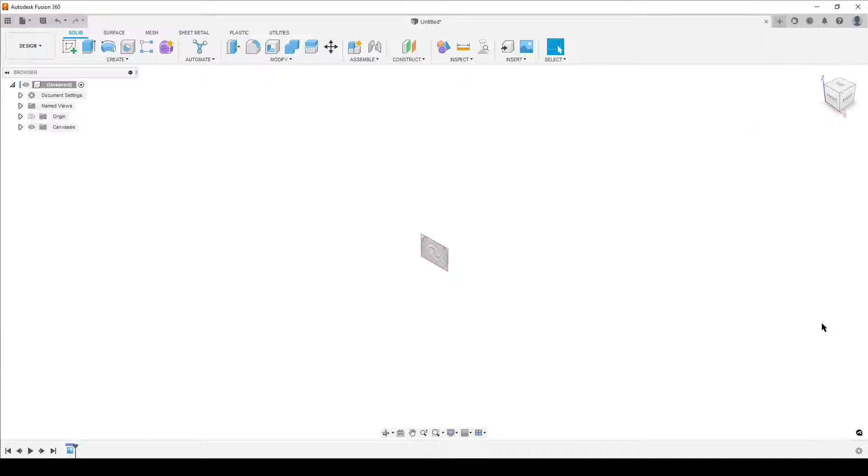The bug is quite simple, it's concerning canvas. So we're going to insert a canvas, insert from computer, select an image which I happen to have on my computer, and select a face. I'm going to do it on the front face here, hit OK, look at the front so it's a bit easier to see the canvas, and zoom in a bit.

I'm going to open up a canvas in the browser, right click and select calibrate. This is the normal workflow, you start by calibrating your canvas. Let's say this here is going to be 100 millimeter, so we zoom it out a bit.

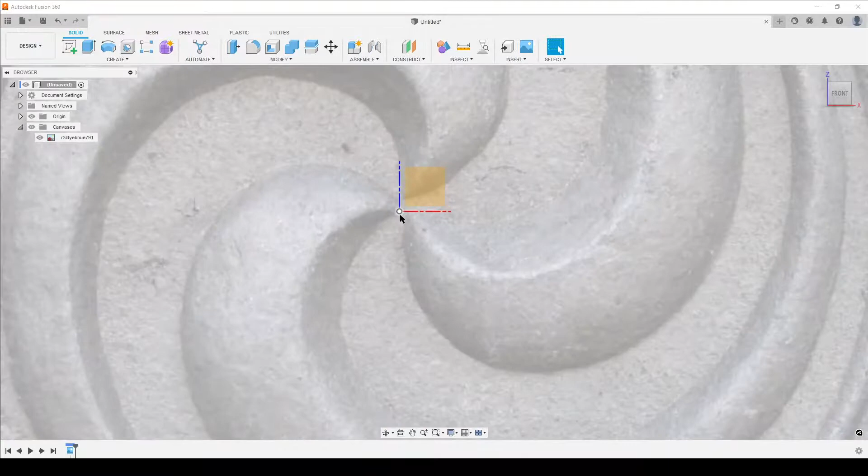We want to check if it's centered, and oh no, it's not really centered. I want the origin to be all in the center, it's easier to sketch things. So I'm going to right click and edit canvas and see what happens. Pay attention to the orientation and the size.

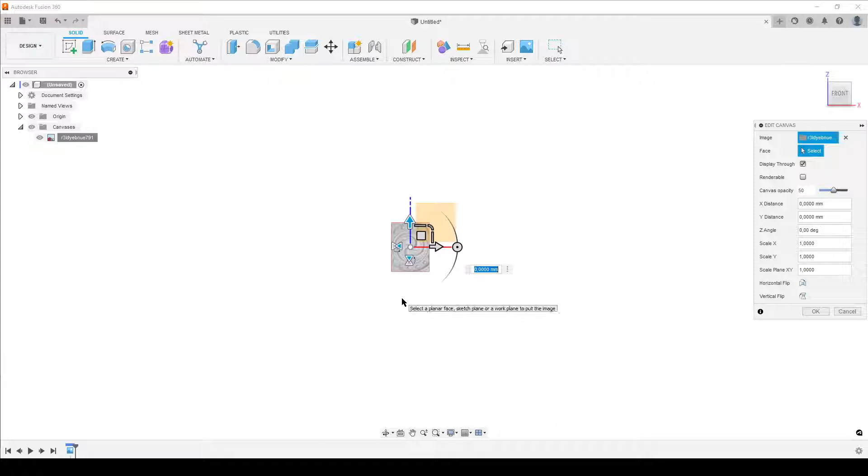When I hit edit the canvas, two things happen. For some reason the canvas gets rotated 90 degrees and it gets rescaled to its previous size before the calibration. I think it's before calibration. Anyway, very annoying bug. We can of course now go in and move things around and hit OK.

Let's say we want it there. That's of course the wrong place. Once again, we can do a calibrate. So, okay, let's just recalibrate it, it's no problem, let's do 100 again. And oh no, even more away from origin.

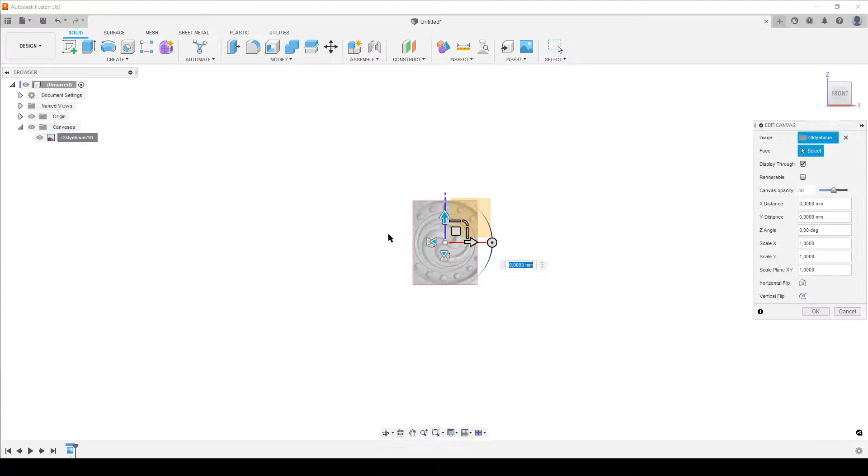Right click, edit canvas, and once again it gets reset to basically its original position, original size, but for some reason rotated 90 degrees. So really annoying bug if you're using canvases.

Here is the workaround. Let's remove this design, start a new one, don't save, I don't need it.

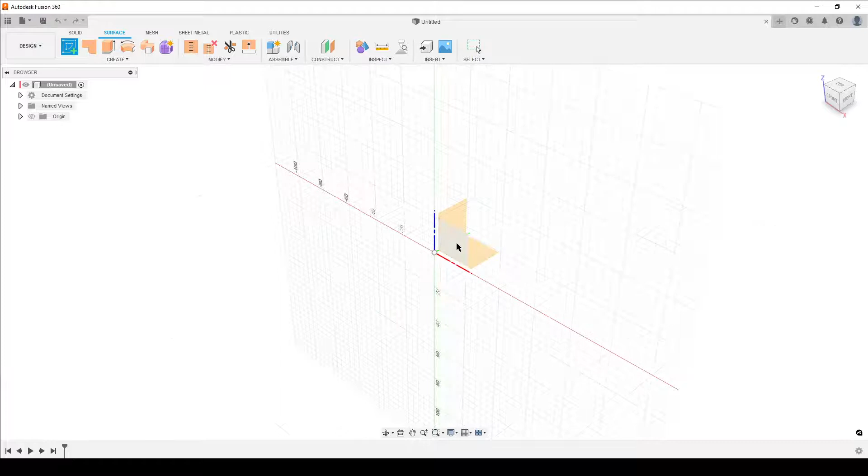We're going to use a surface face as a reference, so we're going to open up our surface tools for now, create a sketch on the plane we want to work on, so I'm going to do it on the front. I'm going to do a simple rectangle, let's do a center rectangle, and for good measure we're going to dimension both sides of it. The size is not important.

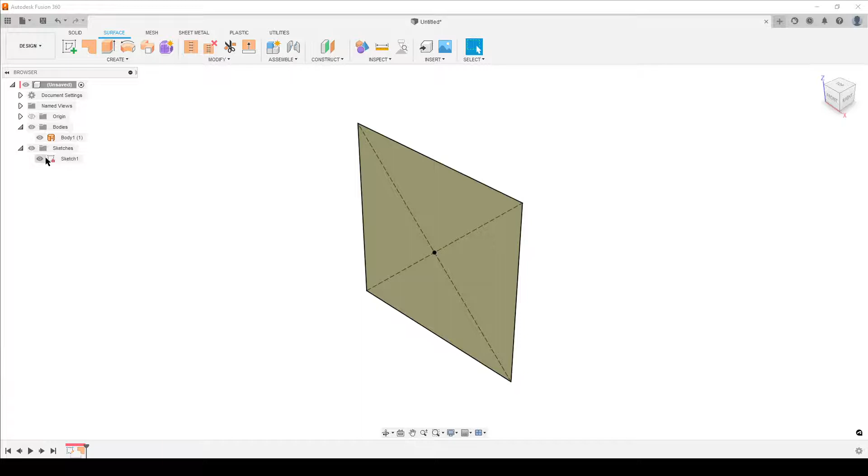We're going to finish sketch, create a simple patch, so we get one simple surface body. Let's open up our browser, the surface body and the sketch. I have auto hide turned off, so I need to hide the sketch for now. And now I do an insert canvas.

So I hit the canvas button, select my image, that one, and this face. Sorry, I'm going to do that once again. Very important when you select here, image, open, make sure you don't by mistake select the plane, select the face of the body. You can see the body highlights. Here's the plane highlighted, here's the body highlighted.

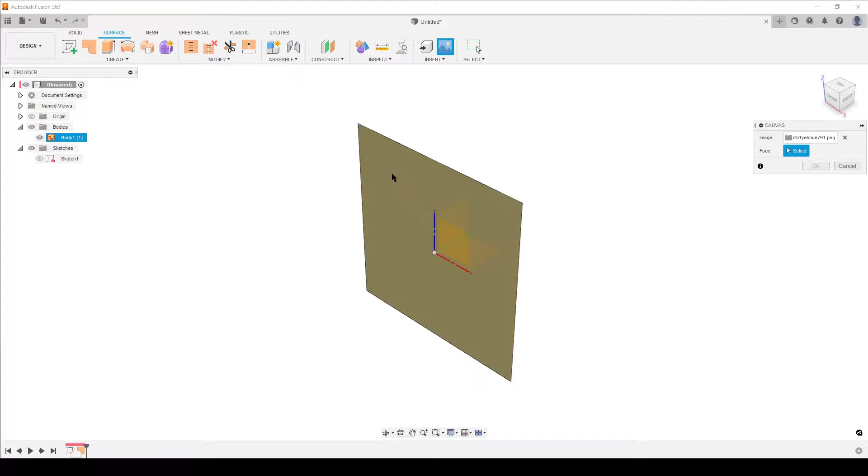So on the body, I'm going to hit OK for now. And look from the front, as you can see here now, here it is. We can now do open canvases, or right click, calibrate. We can now calibrate this to be 100. It should be slightly bigger than the body now.

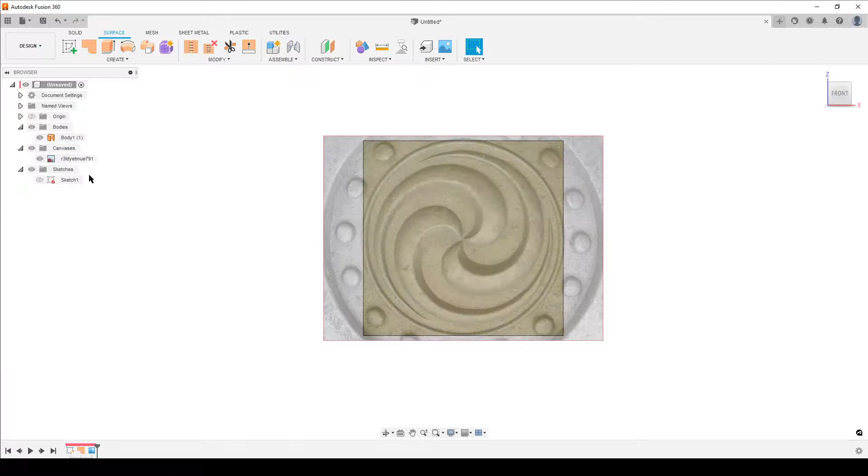Yes, that's good. If we now want to turn on the origin, we can see it's almost correct, but I need to move it slightly. So I'm going to do right click and edit canvas. And you can see it didn't resize, it didn't turn around or flip around or do anything.

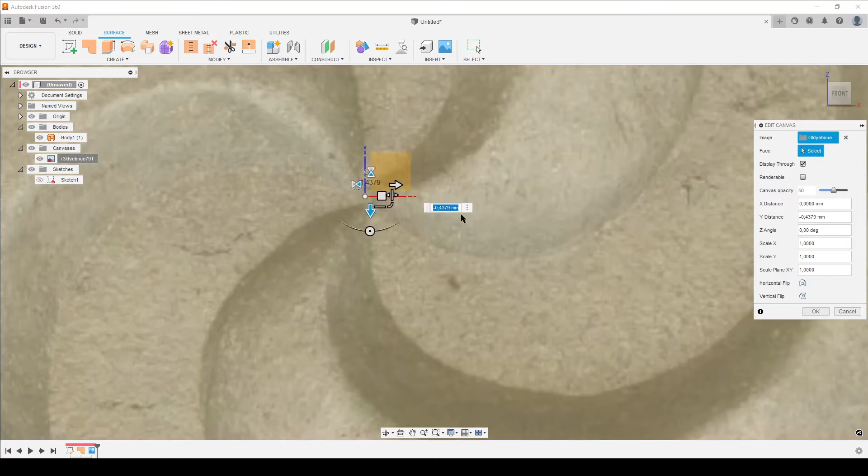Now we can very gently nudge this center point into place, something like that. Hit OK, and the canvas will stay where it is. And of course now you can hide the surface body that you used for reference and hide the origin.

So the fix for now is use a surface body. This video will be removed when the bug is fixed. I will try to remember to remove this video.